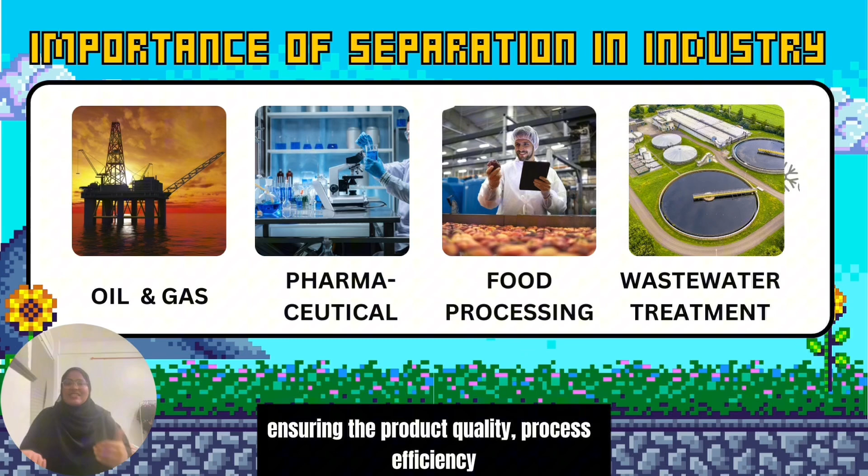The objective of this video is to introduce and discuss new separation methods that offer improvement over traditional methods, and we will explore the challenges faced with conventional methods.

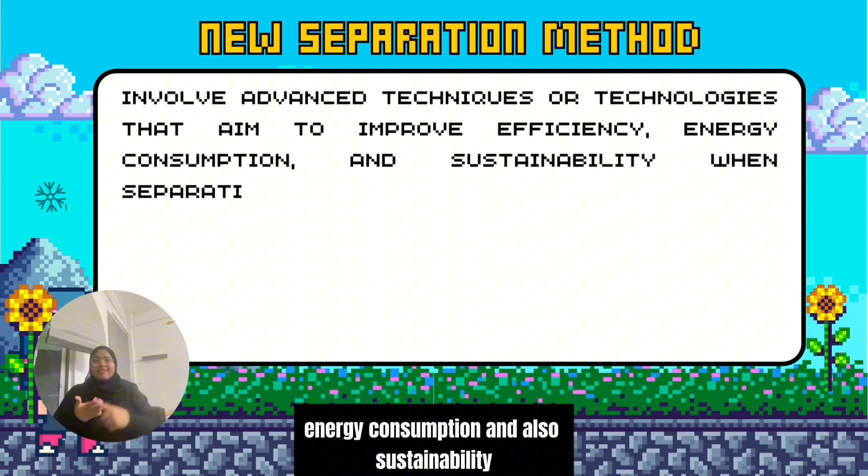We will highlight the potential benefits of innovative approaches. For an overview, this separation method involves advanced techniques or technologies that aim to improve efficiency, energy consumption, and sustainability when separating components in a mixture.

This method often incorporates modern advancements like membrane technology, adsorption, or hybrid systems that address the limitations of older processes, offering improvement over traditional techniques.

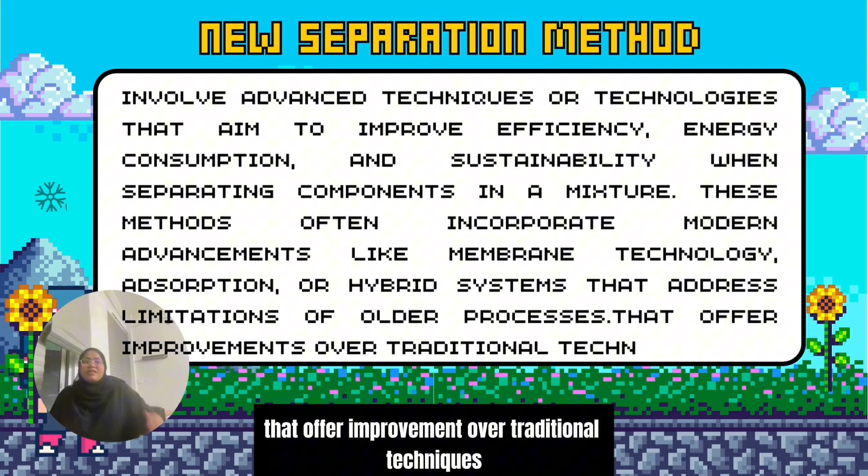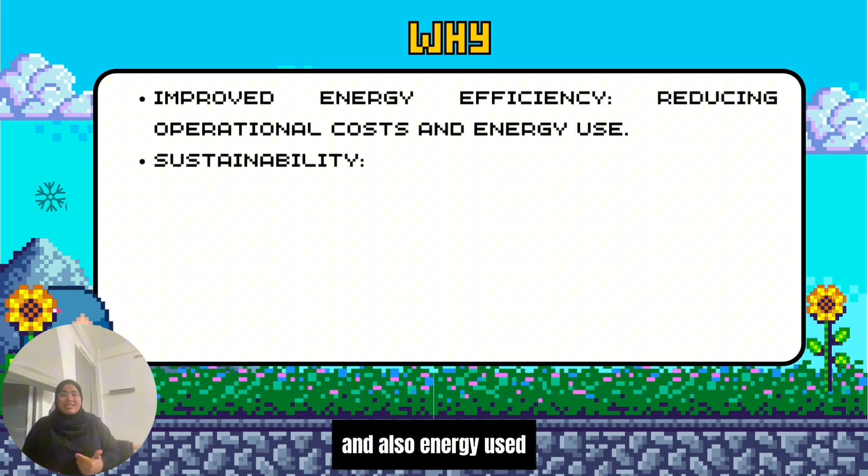As mentioned earlier, these are the reasons why we need new separation processes. First, we can improve energy efficiency as it will reduce operational cost and energy use. Second, for sustainability purposes, it will minimize environmental impact and waste.

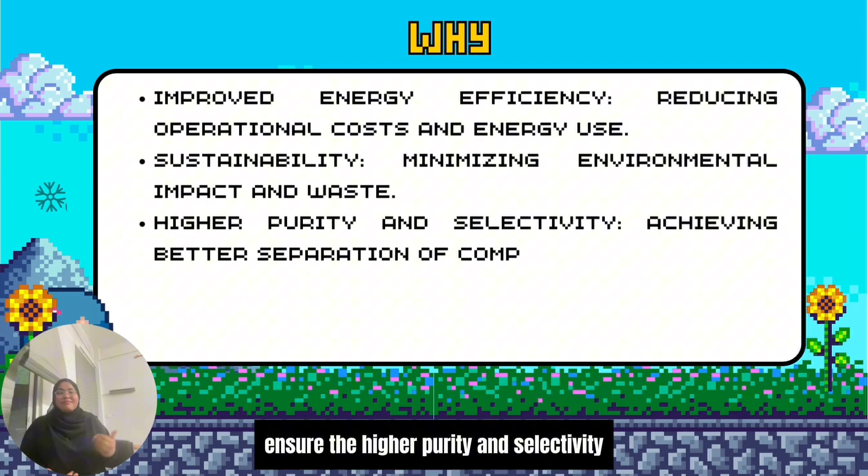Also, this separation process ensures high purity and selectivity, achieving better separation of complex mixtures. Fourth, cost effectiveness, as it will lower the overall process cost with innovative technology.

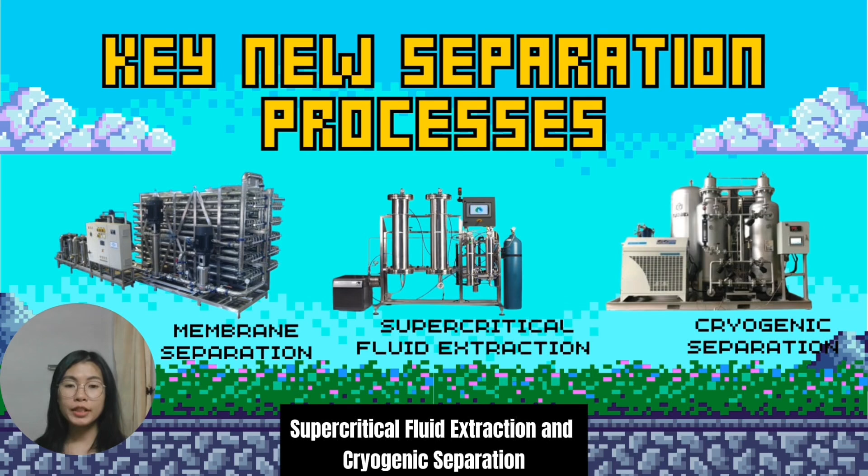New separation processes have revolutionized industry by providing more efficient, precise, and sustainable solutions to address the limitations of traditional methods. In this section, 3 key new separation technologies will be discussed: membrane separation, supercritical fluid extraction, and cryogenic separation. First is membrane separation.

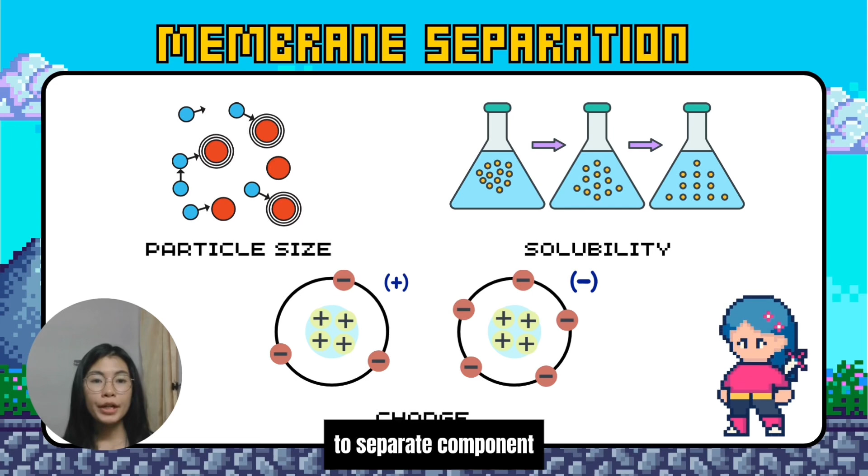This process uses a semi-permeable barrier called a membrane to separate components based on their size, solubility, or charge. There are 4 main types of membrane process: microfiltration, ultrafiltration, nanofiltration, and reverse osmosis. Each type is designed for specific applications based on their process.

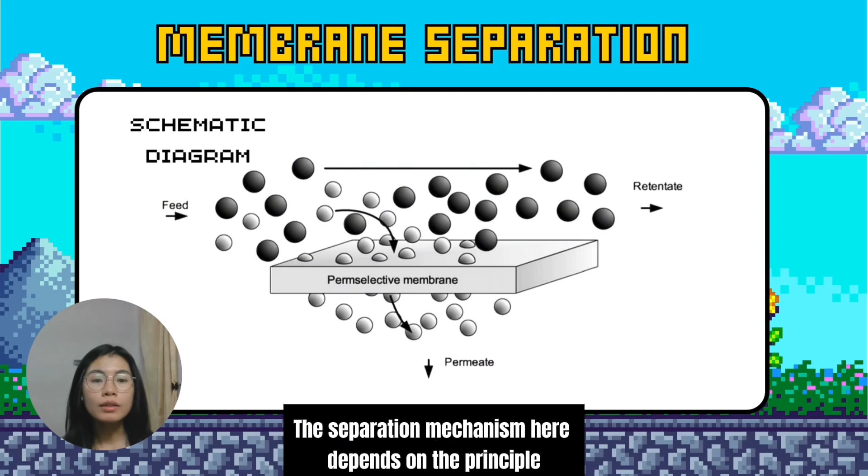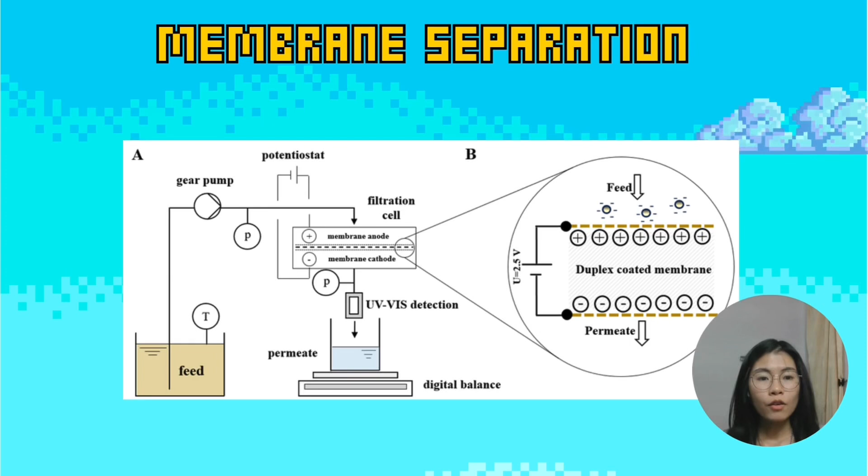The separation mechanism here depends on principles like the solution diffusion model, where the solute dissolves in the membrane material and diffuses through, or the sieving mechanism where the membrane acts as a filter to block larger particles. For charged membranes, electrostatic interaction helps separate ions effectively, making this technology ideal for water desalination, gas separation, and wastewater treatment.

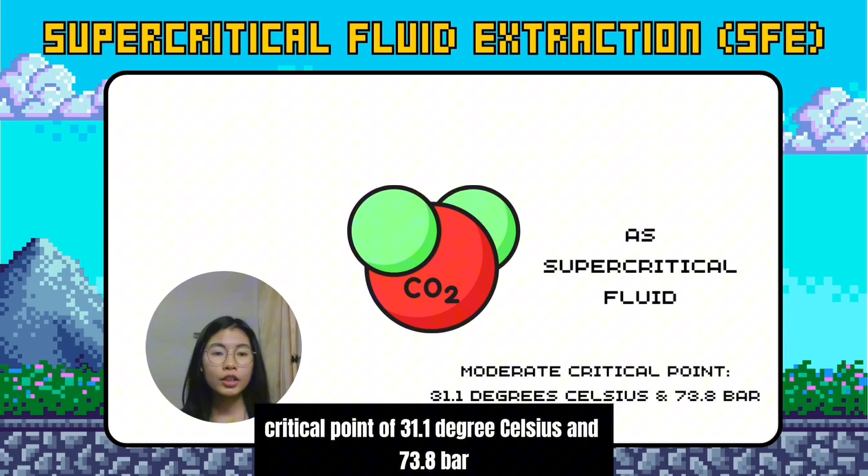Next is supercritical fluid extraction, called SFE. This process uses fluid in the supercritical stage, above their critical temperature and pressure. The most common supercritical fluid used is carbon dioxide, due to its moderate critical point of 31.1 degrees Celsius and 73.8 bar, where it exhibits unique properties of both gases and liquids.

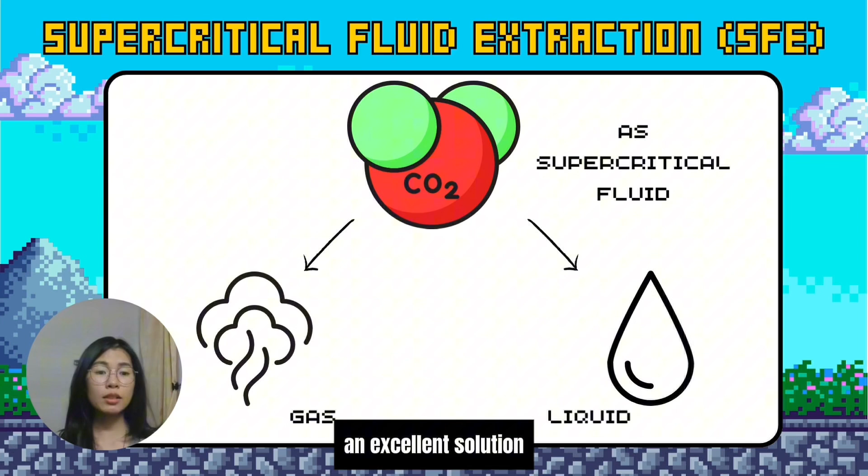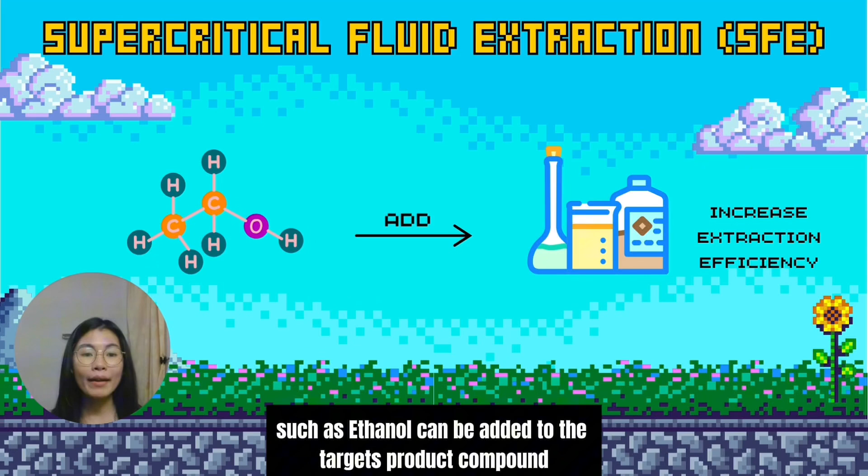At supercritical condition, carbon dioxide becomes an excellent solvent. By adjusting pressure and temperature, its solvent power can be finely tuned to extract specific compounds. Small amounts of polar co-solvent such as ethanol can be added to target polar compounds, enhancing extraction efficiency. The entire process is environmentally friendly as CO2 is non-toxic, reusable, and leaves no harmful residue.

Finally, is cryogenic separation. This method involves cooling gas to extremely low temperatures, often below negative 150 degrees Celsius, to liquefy and separate the components based on their boiling point.

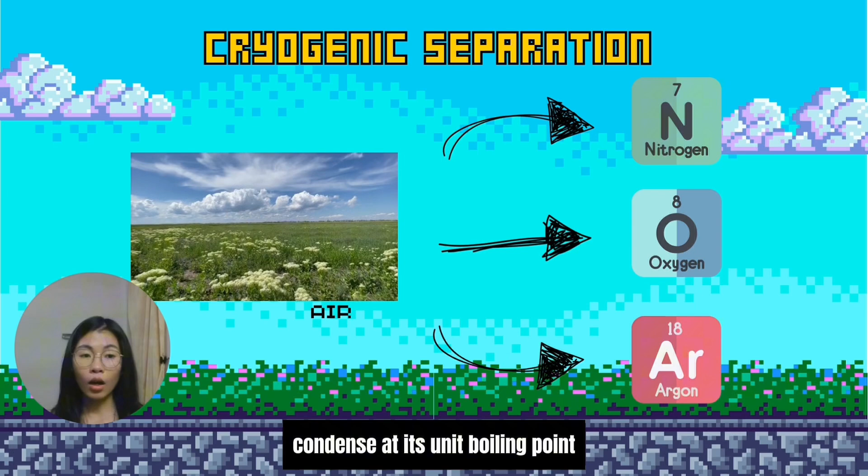For instance, air is separated into nitrogen, oxygen, and argon by cooling it until each component condenses at its unique boiling point. The process starts with compressing, where the gas mixture is pressurized.

Then it's cooled using the heat exchanger and the refrigeration cycle, leveraging the Joule-Thomson effect, where the gas cools as it expands through the cooling valve, liquefying the components as they separate in the cryogenic distillation column.

Next, we move to application and industrial potential. Let's consider new applications in emerging separation technologies. First, we're going to go to membrane separation.

It uses a semi-permeable membrane to remove impurities from water. The process includes reverse osmosis, ultrafiltration to filter bacteria and virus, and nanofiltration. It has energy efficiency, is scalable, produces high quality water, and minimizes chemical use. The challenge for the future is membrane fouling and replacement cost, and pre-treatment is often required.

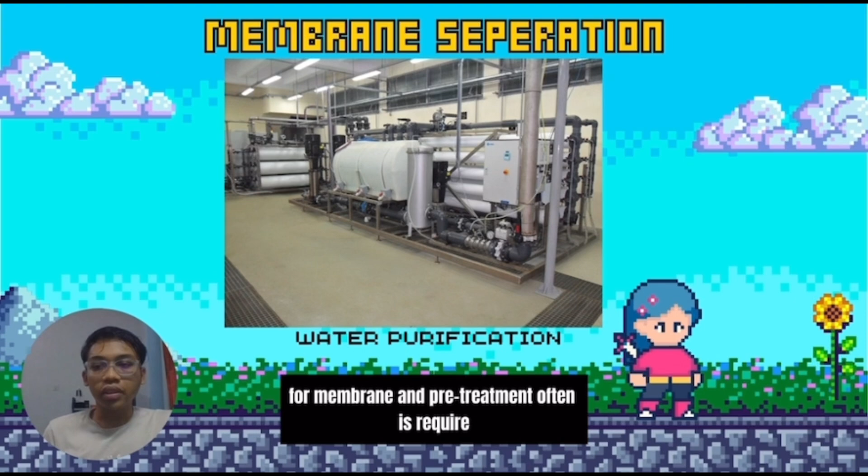Next, we move to supercritical fluid extraction (SFE). There are three types of industries that use it: decaffeination, pharmaceutical, and food industry. In decaffeination, the coffee bean is steamed to open up, and supercritical CO2 flows through it, dissolving the caffeine while leaving the flavor components. The caffeine is separated and removed, and the CO2 is reused.

Next, the pharmaceutical industry. It removes impurities to obtain high purity API, for example purified steroids, vitamins, and essential oils. We use this method because it's selective, safe, eco-friendly, and works well at low temperature.

Next, the food industry. It's used for extracting flavor, oil, and color, and for removing fat or extracting minerals. We use this method because it's safe, chemical-free, eco-friendly, and preserves flavor and minerals.

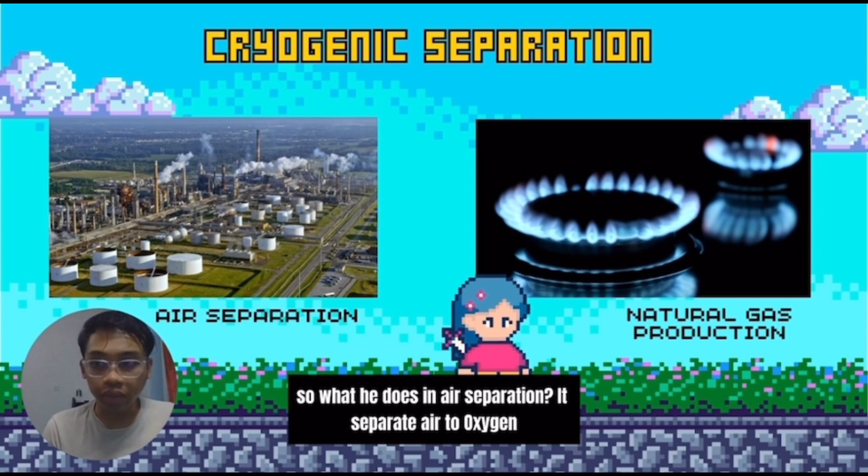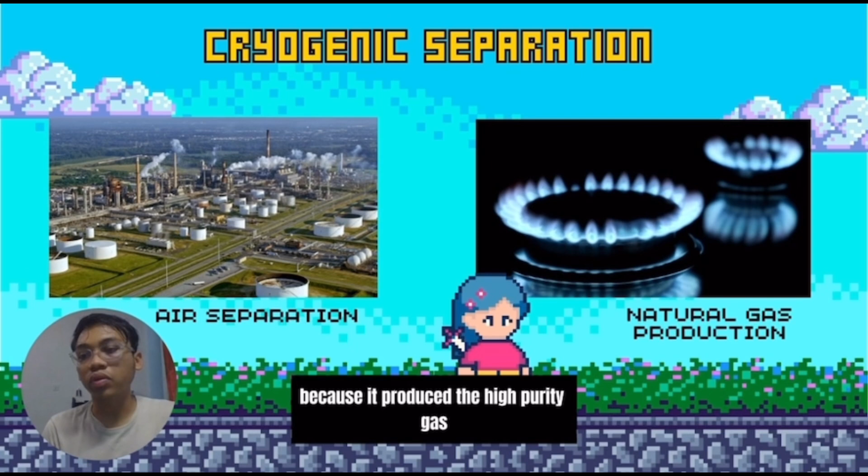Next, cryogenic separation. There are two types in industry: air separation and production of natural gas. In air separation, air is separated into oxygen, nitrogen, and argon by cooling air to cryogenic temperature. The oxygen produced is used in steel making, healthcare, and water treatment. We use this method because it produces high purity gas at large scale and reliable production. The challenge to sustain it is high energy cost and the requirement for complex equipment.

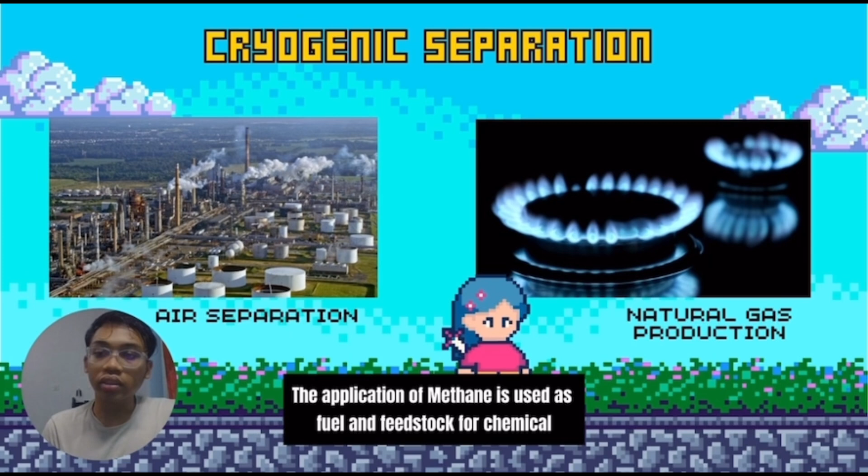Next, production of natural gas. This separates the components of natural gas, for example methane, ethane, and propane, by cooling to cryogenic temperature. Methane is used as fuel and feedstock for chemicals. Ethane and propane are feedstock for plastics and petrochemicals.

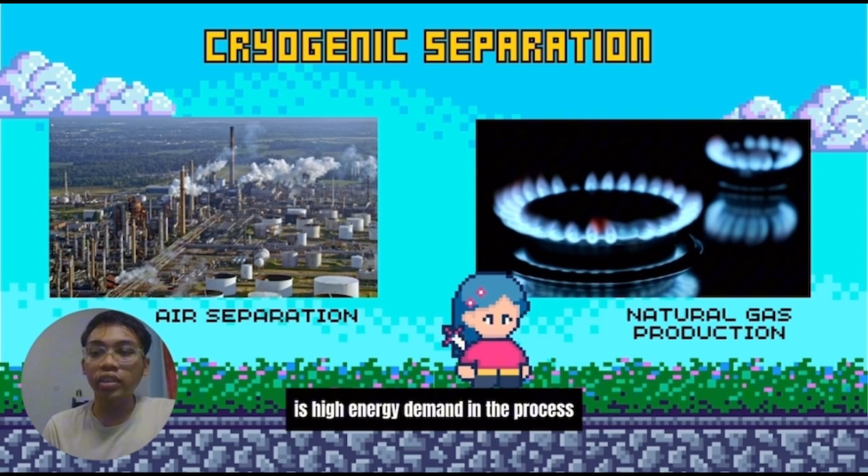We use this method because it's efficient for large-scale separation and produces high purity components. The challenge to sustain this is high energy demand during the process and the requirement for specialized infrastructure.

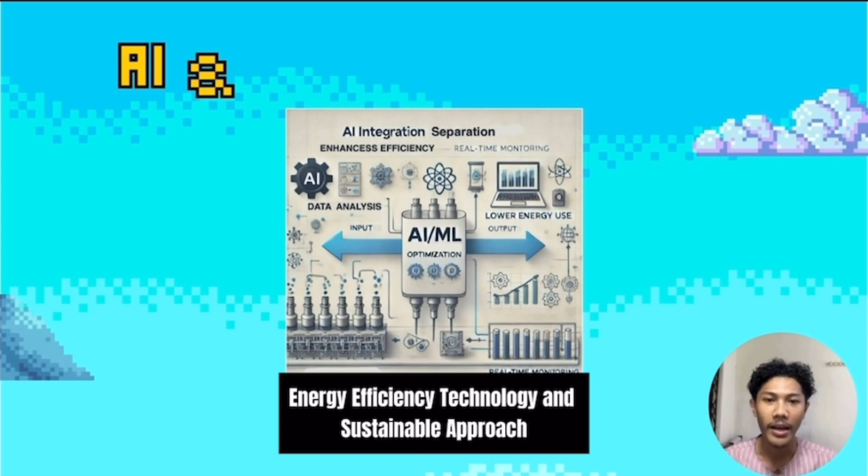As for future prospects, three key areas appear promising: AI and machine learning, energy efficient technology, and sustainable approaches. AI and machine learning are transforming separation processes by analyzing data to optimize efficiency, precision, and control. These technologies predict optimal conditions, identify hidden patterns, and reduce energy use and waste, promoting sustainability. As industries focus on resource management, AI-driven innovations offer smarter, faster, and more cost-effective solutions for a sustainable future.

Hybrid separation processes combine distillation for bulk separation and membrane technology for fine-tuning, significantly reducing energy demand. Integrating renewable energy sources like solar and wind further enhances sustainability by minimizing fossil fuel reliance and carbon emissions. The result is an efficient, eco-friendly system that delivers high-purity products, benefiting both industries and the planet.

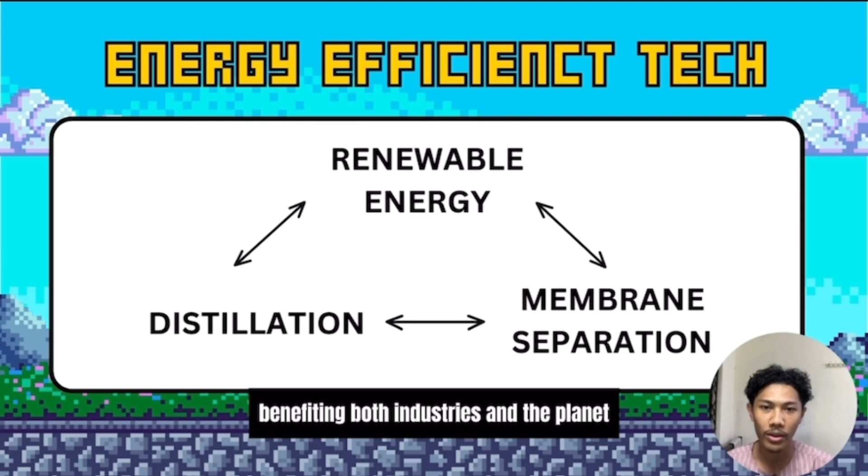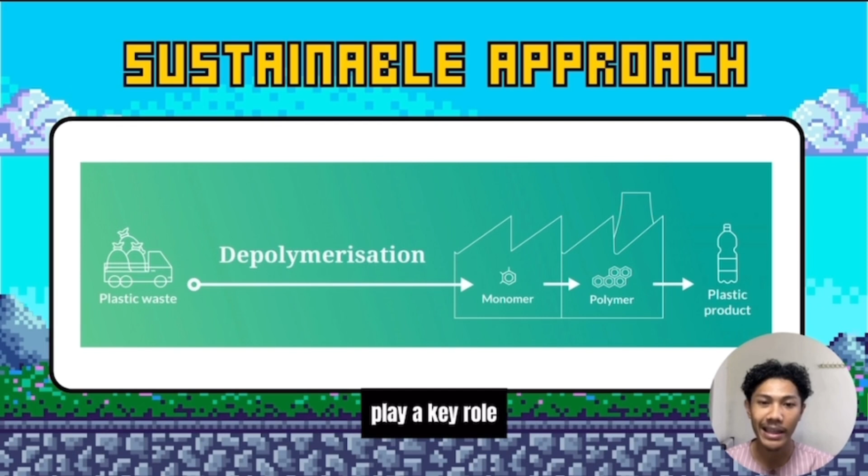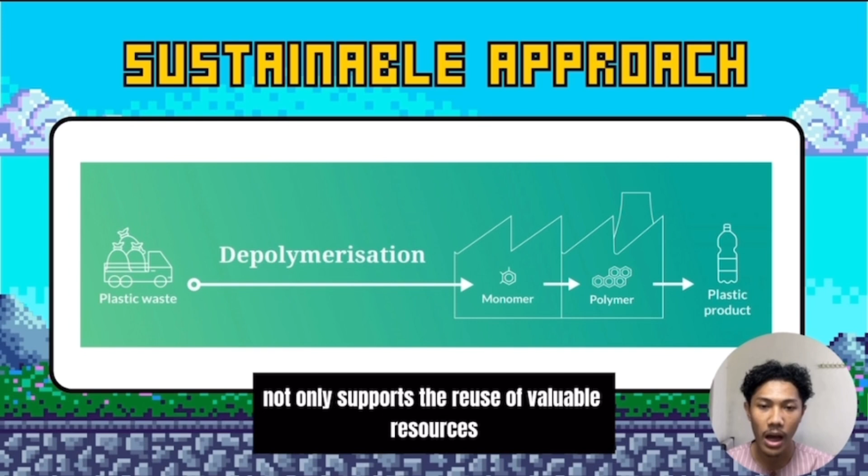The circular economy focuses on resource recovery, recycling, and minimizing waste through continuous material reuse. Separation processes such as depolymerization play a key role by breaking down polymers into reusable monomers, enabling efficient material recovery and reducing environmental impact. This sustainable technology not only supports the reuse of valuable resources but also enhances recycling efficiency. As industries increasingly prioritize sustainability, depolymerization stands out as a vital tool for advancing eco-friendly and closed-loop production systems.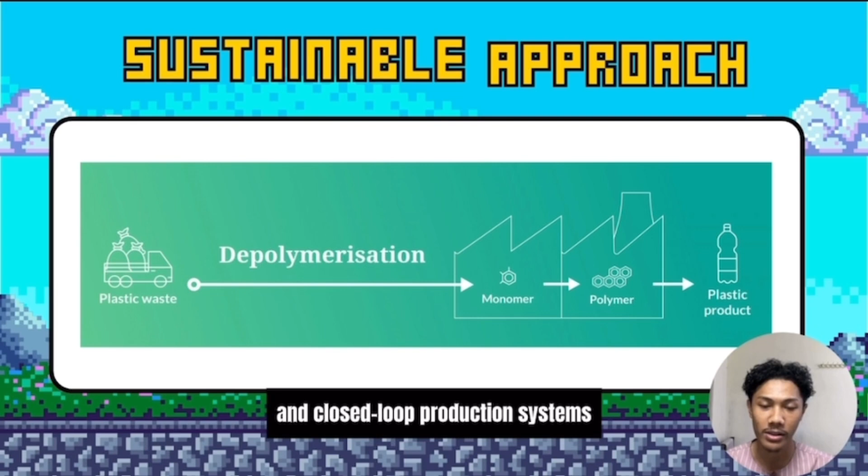In conclusion, emerging separation technologies like membrane separation, supercritical fluid extraction, and cryogenic separation are overcoming the limitations of traditional methods. These innovations offer greater efficiency and broader applications in water purification, food processing, and pharmaceuticals. With AI and machine learning integration, future processes will become even more energy efficient and sustainable, supporting global environmental and resource conservation goals.